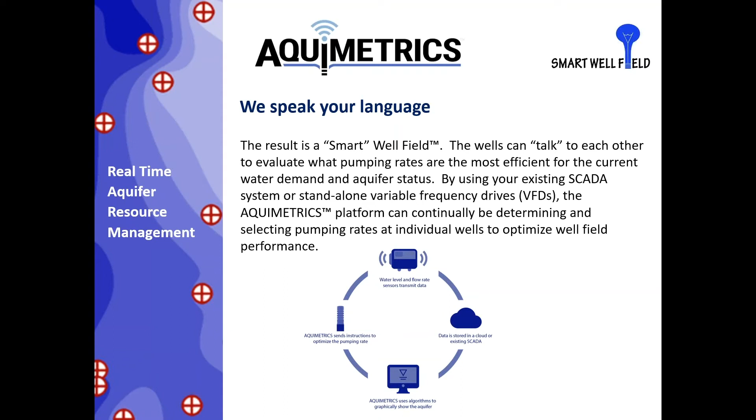What is a smart well field? A smart well field enables operators to employ hydrogeologic principles to accurately make real-time and automated decisions regarding pumping rates, schedules, and well maintenance and rehabilitation events. Specifically, a smart well field is a network of wells where flow rate and water level information are continually analyzed to turn pumps up and down and on and off to better manage an aquifer resource.

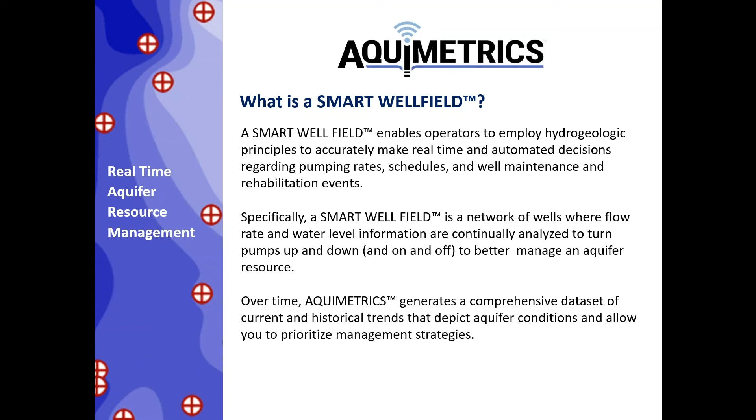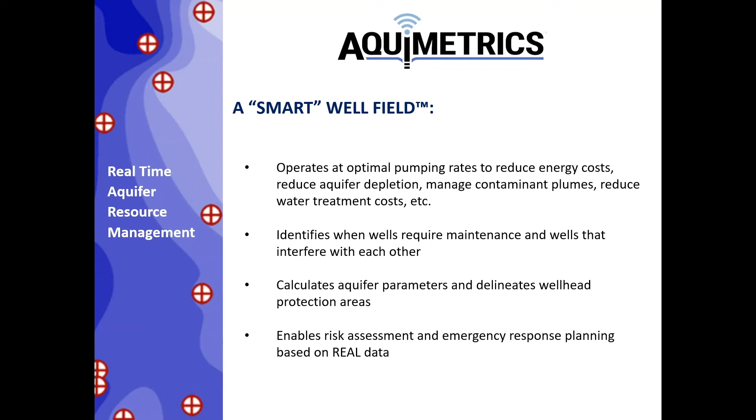Over time, Aquimetrics generates a comprehensive data set of current and historical trends that depict aquifer conditions and allow you to prioritize your management strategies. A smart well field operates at optimal pumping rates to reduce energy costs, reduce aquifer depletion, manage contaminant plumes, reduce water treatment costs, etc. It also identifies when wells require maintenance and wells that interfere with each other. It calculates aquifer parameters and delineates wellhead protection areas, and it enables risk assessment and emergency response planning based on real data. And we'll get more into these later.

So why this platform? Well, what we found over the years is that many well fields have been developed without a careful consideration of the local hydrogeology. More times wells are installed because the utility or operator already owns the property, or they want to site a well that is near the water treatment plant, or they're totally reliant on a well driller to tell them where to go to get some more water.

But groundwater does move in a predictable manner that is governed by physics, mathematics, and chemistry. Well performance can be optimized when wells are designed, installed, developed, operated, and maintained properly to ensure that the aquifer is being managed in a sustainable and an efficient manner.

Many well field operators already continuously monitor the well yield using flow meters. Fewer well field operators accurately monitor the water level in the well. By monitoring both, a hydrogeologist can perform numerous calculations to evaluate the well efficiency, well interference, entrance velocity, and capture zone of multiple wells.

So here are the technology components. The hardware consists of pressure transducers. This is a pressure transducer up in the upper right here. It's just a stainless steel probe connected to a cable. Many of you also have a digital flow meter that is connected into another telemetry box, or this telemetry box, or your SCADA system. The telemetry is the relatively new component that has really made this technology viable and brought

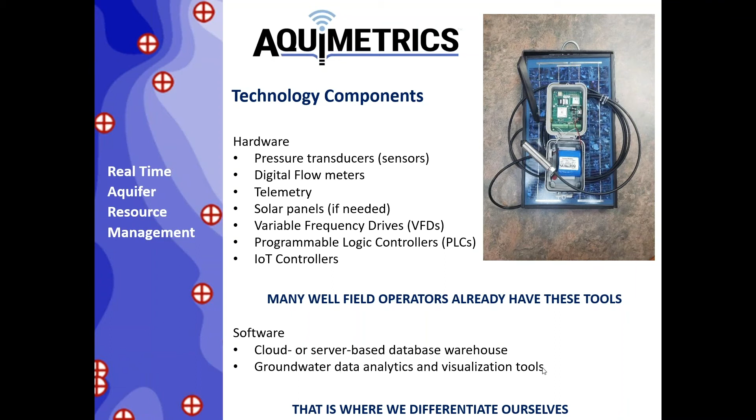So how do we manage your resource? There's numerous ways that we can specifically address the issues that you guys face every day. There's the drawdown and the energy consumption. There's the specific capacity, well efficiency, and entrance velocity. There's well maintenance and rehabilitation issues. There's well interference issues. There's the new well siting. When you have to put a new well in, where do you put it in, and how is that going to affect other wells? How is it going to affect your neighbors?

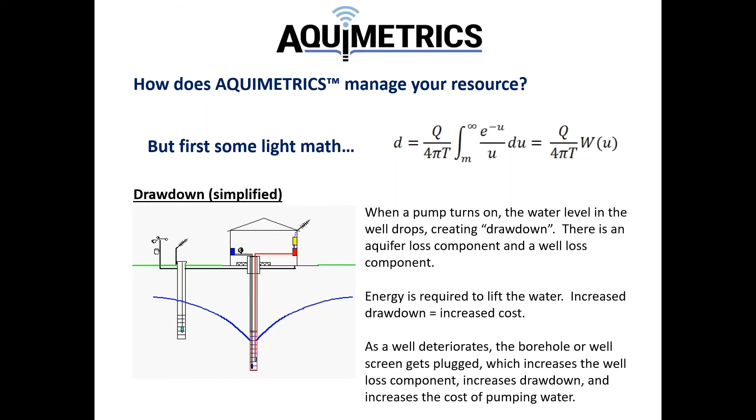A couple more technical terms that set up the basis of what our technology is actually doing. Specific capacity is defined as the ratio of the pumping rate and the amount of drawdown. So if you're pumping at 100 GPM and the drawdown is 20 feet, then the specific capacity of the well is 5. 100 divided by 20 equals 5. So over time, the well plugging will decrease the specific capacity. Let's say you're still pumping at 100 GPM, but your drawdown goes to 50 feet.

That would be a specific capacity of 2, and it would indicate that your well is getting plugged and it probably should have some maintenance done to it. We find that most operators do track their specific capacity, but we don't find a lot of operators who understand these next two terms in particular.

Well efficiency is the ratio of aquifer loss and well loss. It can be estimated in some cases by performing what we call a step drawdown test, and I'll demonstrate this a little later. But you can pump at various pumping rates over time, and it determines the sweet spot for each well, and it indicates if a well needs rehabilitation or redevelopment.

Even less monitored by most operators is the entrance velocity. So if you can visualize what's happening down in the hole as you're pumping water, all this water is entering this relatively small borehole from around the aquifer. And so it's defined as the speed at which water is coming into the well.

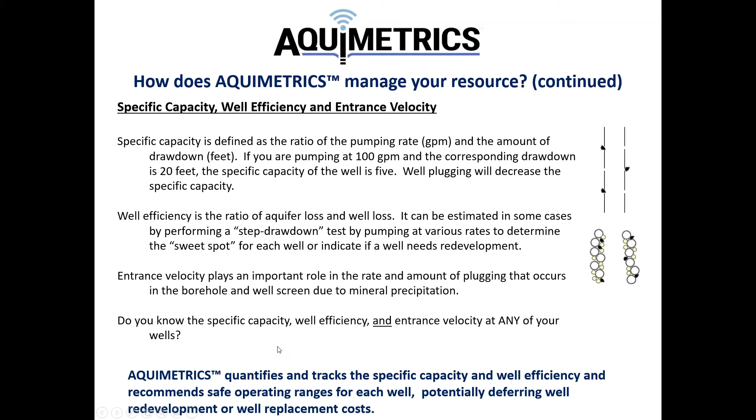So like I said, over time, the condition of the well deteriorates because the borehole or the well screen gets plugged with the mineral precipitation. We found that the well field managers generally rely on 3 different methods to decide when to redevelop a well. Probably the most common is a routine schedule. We ask our clients why they do it that way, and it's usually because it's always been done that way. The common schedules are 3, 5, 7, something like that, depending on obviously the geology and the hydrogeology of the area.

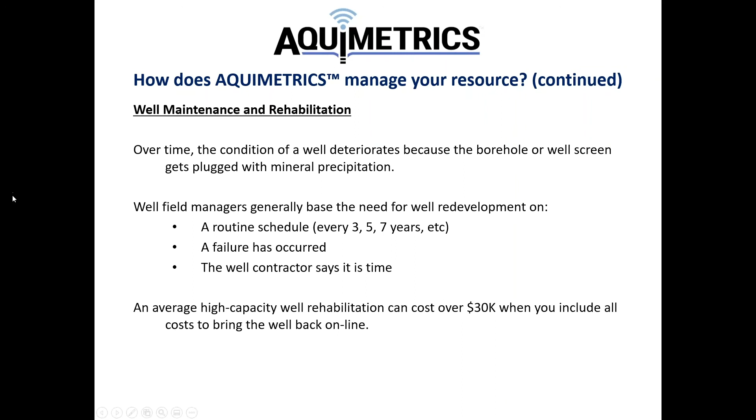We actually have had customers who fully admit that they pump their well to failure rather than spending the money on redevelopment. If they live in areas where shallow groundwater exists, perhaps a new well is just as expensive as a well redevelopment, so they'll pump to failure. It's also pretty common for a well contractor that probably installed the well or is their pump or well maintenance contractor, they'll call and say that it's time to do it.

In our area of the country, up in the upper Midwest, our bedrock wells are generally between 500 and 1,000 feet deep, and it can cost over $30,000 to pull the pump, mechanically or chemically treat the well, perhaps do a well video at that time, and then put the pump back down and bring the well back online.

We think there's a much better way to do that if we can utilize the sensor data from the well, the water level sensor and the flow rate sensor, and in a lot of cases, water quality sensors. We can have a much more scientific way of determining when the well needs redevelopment. We've had customers who have purchased our technology simply for this reason, that it helps them to have a much better idea what the efficiency of their wells is and when it's time to redevelop.

Certainly the return on investment of our technology is extremely quick. If we can come in and say there were 2 or 3 wells scheduled for rehab this year, if we can defer that cost, that can save many, many times the cost of the investment in the technology.

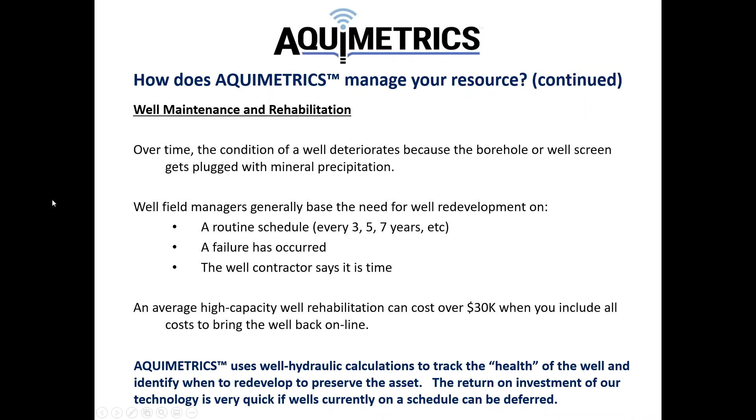Another common thing we see is well interference. We've run across lots of customers who say, well, we can't run wells A and B or 1 and 2 at the same time. We're not really sure why, but we just don't. And it's generally because the wells are placed too close together.

So we've created a mathematical solution to this. We have a database tool that hooks up to the data stream, and it can go across your well field, and it will quantify the amount of interference that 1 well or 2 wells is creating on any other wells. And I'll demonstrate that.

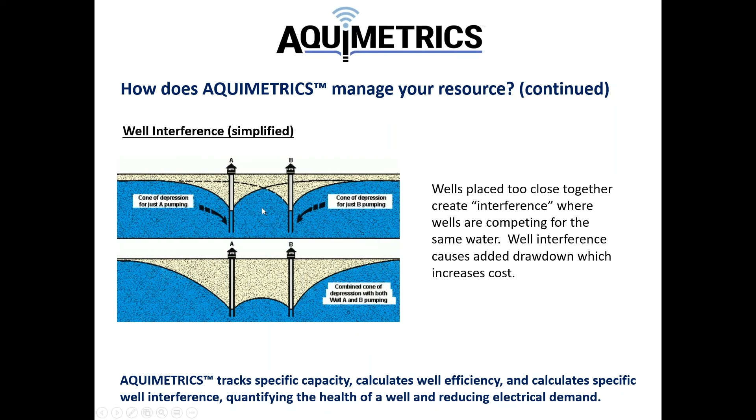Another big important component is when you need new wells. Obviously, as the population grows in your area or your wells are getting older, you need to put new wells in. A lot of times, operators will spend a lot of money to develop a groundwater model that is used to help evaluate the effects from a new well. Unfortunately, these models are based on assumptions that never accurately depict a real aquifer.

Our solution uses real data. Moreover, we learn over time, and we can really understand how the aquifer reacts by watching the effects of pumping and the effects of recharge, precipitation, and we can do this really at a fraction of the cost of a conventional consulting fee because the data are in a form to be analyzed immediately upon us leaving the installation.

So wellhead protection, risk assessments, and emergency response plans. Most of you probably already know that there is a federally mandated wellhead protection plan for all public water providers, including both public and private water suppliers, schools, churches, rest areas. Wherever the public is drinking water, there are certain levels of wellhead protection plans that are required.

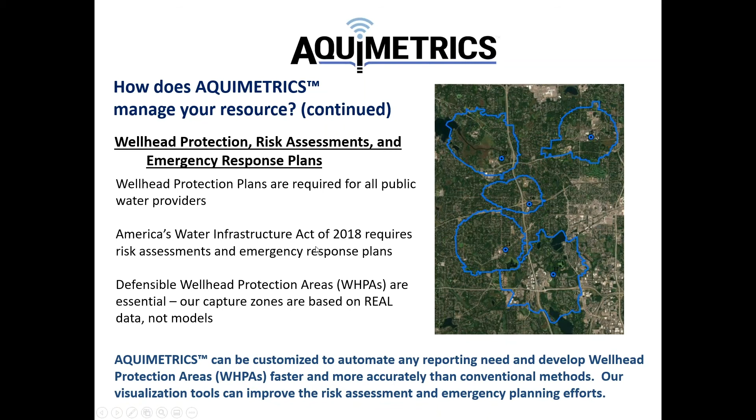In most areas, if you're going to put in a well that can pump a couple hundred gallons a minute, you're going to need a permit from the local water authority or regional water authority to be able to do that. Oftentimes, these require aquifer testing and long-term studies, and believe me, we've been doing these for 30 years, and that's kind of one of the reasons we developed this technology, because our technology easily incorporates the wireless access to the pressure transducers and flow meters, and we're basically doing all the hydrogeology all the time. So once you install our equipment, you are always performing an aquifer test 24/7, 365.

So water rights and liability assessments, litigation support. Obviously, water rights disputes and groundwater contamination lawsuits have traditionally relied on groundwater models that have assumptions that are rarely defensible. Large water users, including mining companies, irrigators, food and beverage processors, oil and gas companies, and public water suppliers, need to understand the potential liability of their water withdrawals.

Superfund sites often contain many extraction and monitoring wells to remediate contaminant plumes. The correct placement of wells and long-term monitoring strategy are important for cost control and defensible decision making. Because we use real data and advanced hydrogeologic methods to continuously record the effects of your pumping, both yours and people outside of your well field, on the local and regional levels, our database tool is a user-friendly data analysis platform.

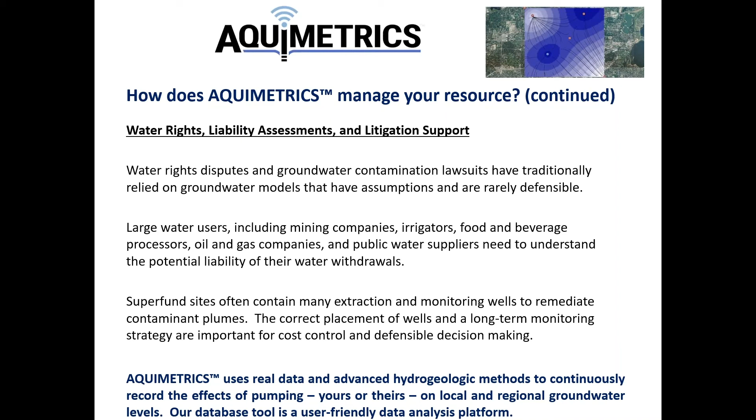For water treatment issues, we've talked about the minerals in the aquifer. In many places, especially in rural areas, we find the iron, manganese, and magnesium are generally not health related, but the staining and taste issues are major cost and customer satisfaction problems for water suppliers. Our technology can actually go around and evaluate the geochemistry of the well field. We can evaluate the optimal pumping rate to reduce water treatment. In a lot of cases, we can evaluate possible blending strategies, and we can perform a cost-benefit analysis of new wells versus water treatment issues.

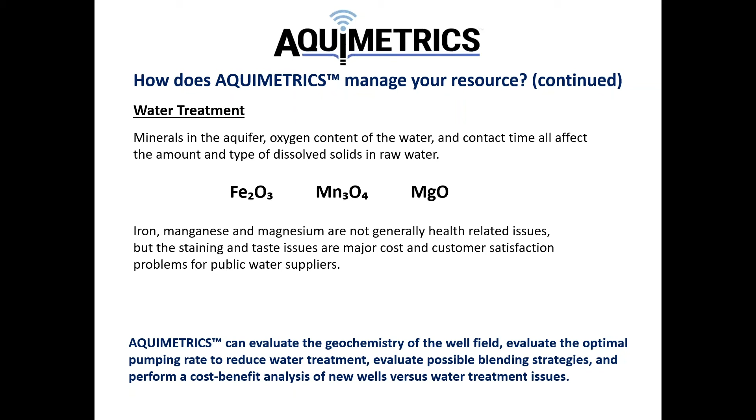In some areas of the country, they actually enforce water use restrictions. We find that communities who don't totally understand their aquifer are kind of afraid they're going to deplete the aquifer, especially in the summer when a lot of residential and commercial and golf courses are irrigating, and so they go on to an odd-even lawn watering restriction. These restrictions are seldom based on hydrogeology, and obviously if you go on an odd-even watering restriction, you're reducing your revenues by 50% during the periods of the watering bans.

So what we do is, over time, the technology will learn, and it will give you a predictive tool that you can use to see whether the current climatic conditions, i.e. recharge or drought in some cases, are going to make a situation where you could lower the aquifer. But in many cases, the technology will give you the confidence that you don't need to do that.

So what do you need to operate? We basically are leveraging the data from your existing SCADA system, or if you don't have a SCADA, it's very inexpensive and quick to install the necessary equipment to get you hooked up in the cloud. But for a smart well field, you do need water elevation data, pressure transducers or equivalent. There's lots of different methods of measuring water levels out there. We do need electronic flow rate data.

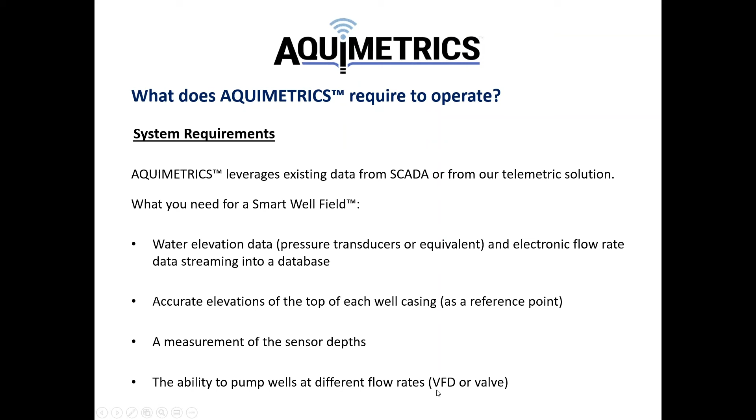So we tap into the existing SCADA or mine the data. We calculate specific capacity continuously by dividing the flow rate by the feet of drawdown. We calculate well efficiency by doing a step drawdown test, and we can watch that over time. The well efficiency is the ratio of the aquifer loss and the well loss. We also can calculate the entrance velocity at various times during the year by looking at the open area of the well by the flow rate.

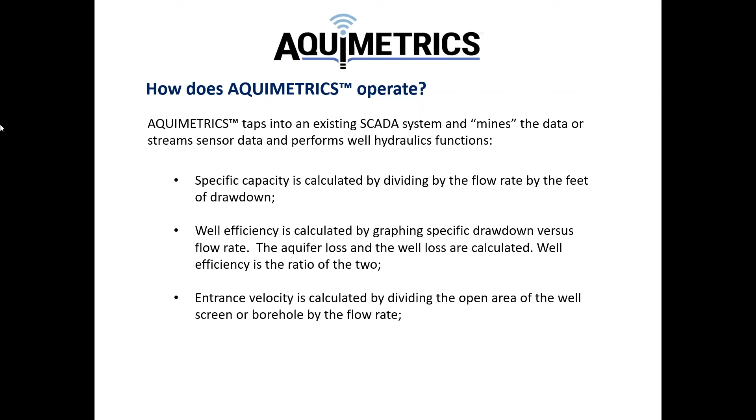So finally, the other two things we do, and probably this is the crux of what we're offering, is a potentiometric surface interpolated using a nonlinear drift kriging algorithm to accurately visualize the groundwater across the well field. The potentiometric surface is just a fancy word for a groundwater contour map. But what we can do is combine these individual timestamps that can be 1 minute, 5 minute, 15 minute, hour, day, doesn't matter.

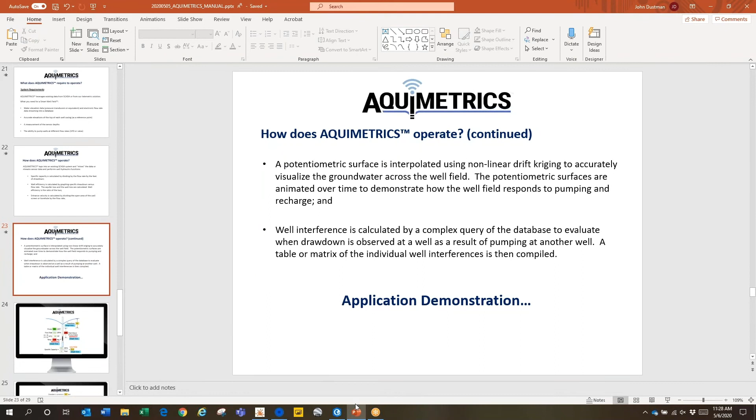We can combine these into essentially a video so you can see how the aquifer responded over time to changes in pumping and recharge. And finally, we can calculate the well interference across the well field and create a matrix for you that will help you determine what flow rates would prevent the interference. So with that, I'm going to jump out of the presentation here for a minute and demonstrate some of what we're talking about here. I'm going to kind of work backwards.

We've been an Esri business partner for over 25 years, and we thought it would be a good idea to integrate our technologies into the ArcGIS platform. For those of you not familiar, this is a product from Esri. It's called ArcGIS. They have different platforms. They now are supporting a desktop version called ArcGIS Pro, but they also have developed an ArcGIS Online and an ArcGIS Enterprise solution. We found that most of our customers have this program somewhere within their organization, usually the planning department. We haven't found a lot of water departments that are able to utilize this technology.

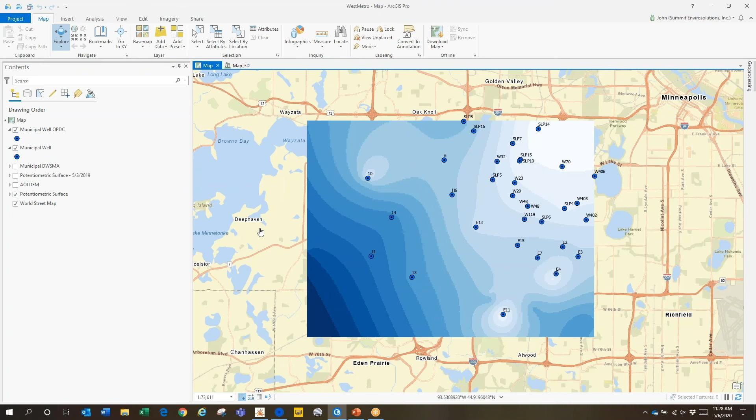So we felt that since most organizations already have this, we don't need to reinvent the wheel and create a GIS that you're able to zoom in, zoom out, change the base maps from streets to topographic maps to aerial photos, and we generate these potentiometric surfaces in a package we called Aquimetrics. By being able to export these maps, we found that it's very useful for communication amongst the project teams, public education, city council meetings.

Once people understand that these different colors represent different groundwater elevations, most people kind of understand that groundwater flows from high levels to low levels, and so the darker colors represent higher elevation. So this gives you a pretty good picture of what water is doing.

For our demo, we've been working with communities in the southwestern area of Minneapolis for many years, and so we've been able to get data from several different municipalities and look at those water levels as a whole, really regionally for the first time. We don't know of a lot of other areas that are doing this right now. So this is just the ArcGIS component. So how do we generate these images? We have another package that comes with our technology.

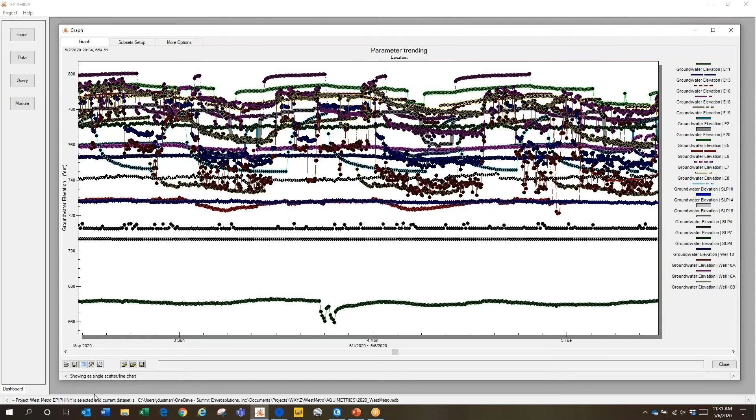I like to show this because it's almost like a Jackson Pollock painting. How could you possibly evaluate which wells are influencing other wells? So the same data set that you're looking at here has been analyzed using our third package that I'll demonstrate. And this is really the heart of our technology, and this is called Aquilytics. So this is where the heavy lifting is done to be able to look at groundwater in a much different way than has historically been done.

So again, this is the same data set that we were just looking at in the graphing package, and this is what we call our current conditions window. This is a potentiometric surface or a groundwater contour map across the well field in this particular time period. Now, these 3 municipalities, they collect data at different frequencies. So obviously we can't interpolate data that hasn't been collected.

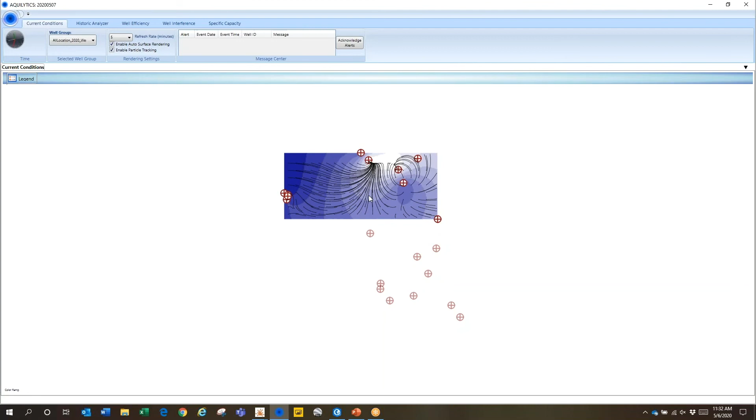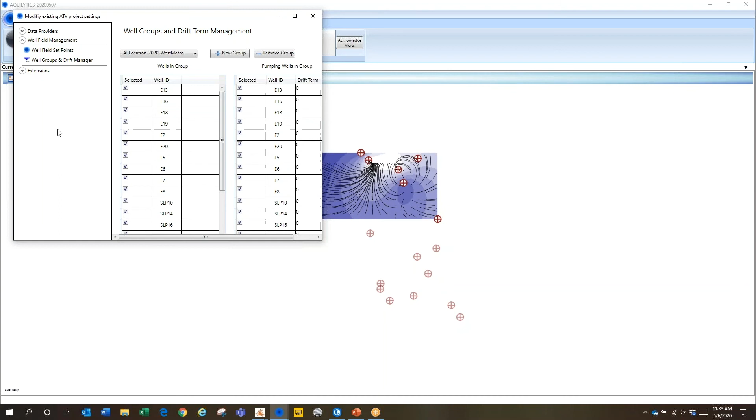So what I'm going to do is go in and kind of go under the hood for you. And this is totally user manipulative. You can come in and you can look at different wells. If I wanted to take wells out or put wells in, you can come in and create your own well groups. You also can configure all of the extensions. So for the current conditions, I want to see all the 2020 West Metro wells. I want my colors to be 10.

I want to start, I'm going to change this. Well, it looks like it just refreshed. And so it came out to a time period where they had all the wells. For the historic analyzer, I kind of like to crank the colors down, and we can decrease the cell size so we get a much crisper map.

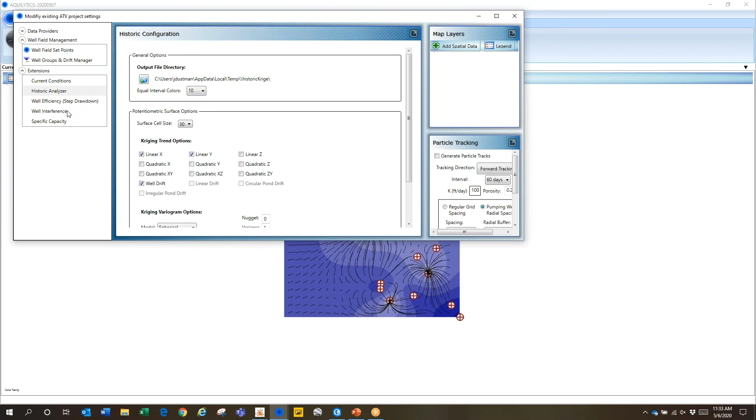The well interference tool that I'll demonstrate in here for a minute, what I've said is in order to evaluate interference, I want to see a change by 1/10 of a foot within 5 minutes of a pump turning on. But you can obviously change these depending on the type of aquifer that you have. So I'm going to save this, and it's going to come out and refresh.

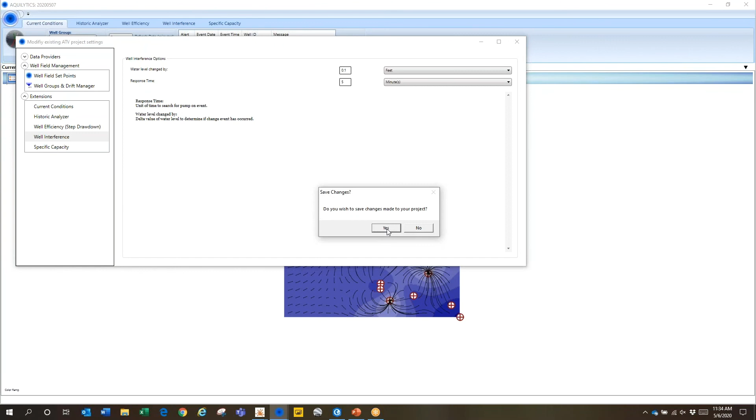While it's refreshing, I'm going to go in, and this is the historic analyzer component. And with this, I'm going to resize the window to fit the well field. I'm going to say I want a West Metro well. I want to see the minimum amount that the aquifer drew down over a day between May 1st and May 6th. So I'm going to start, and it's going to say we're going to do 6 for you. Would you like to proceed? Yes.

So this is where the mathematics come in. Now it's taking the actual water levels and flow rates from all those wells, and it's using a relatively sophisticated algorithm to generate these pictures that, again, show which wells are pumping, which wells aren't, and how the water between those wells is behaving. So we talked about this concentric circles or the cone of depression. This well just turned off. This well is on. This well is on. And so over time, it's building these animations so you can see whether your well was affecting other wells, but maybe more importantly, where water is coming from and where it is going.

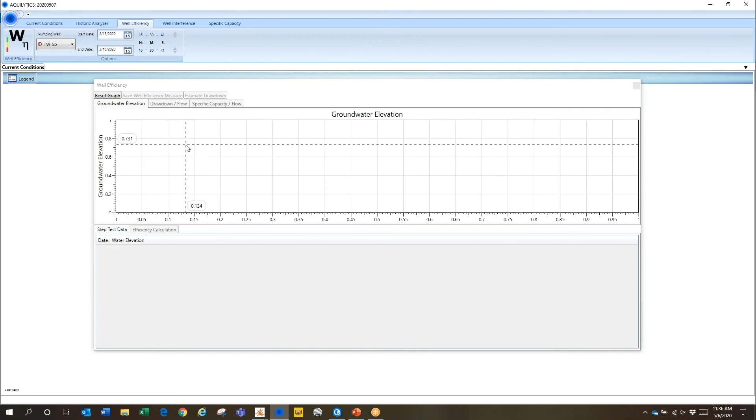The well efficiency tool: if a lot of you have variable frequency drives or have valves on your wells, what we do is we work with you, and you can run what's called a step drawdown test. And it's called that because you increase your flow rate incrementally, maybe at night, maybe between 2 and 6 in the morning, you can run this test.

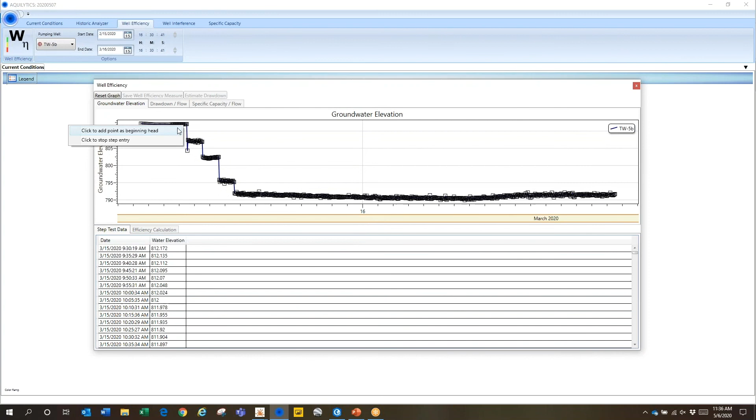You might do it once or twice a year, but what we've done is we've embedded the mathematics behind this graph. And so if I right-click and I come to the bottom of each step, and I would do this more carefully, obviously, if this was real, but for demonstration, what we've done is embed the math behind here so you can quickly come in and look at the well efficiencies.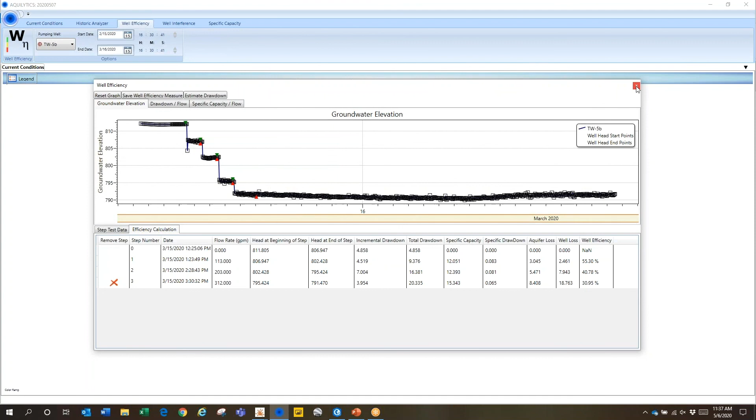So you can see that here's your aquifer loss component, your well loss component. Here is the well efficiency, and you can see that it started out at about 55% efficient, but went down to about 30% efficient after the last step. And so this well would probably be a good candidate for some maintenance or some rehabilitation. So that's kind of the well efficiency tool. There's lots of other graphs and metrics that we've included, but I'll skip through that.

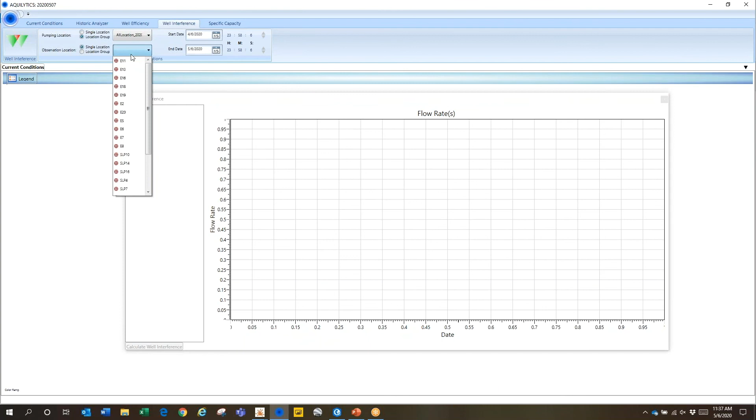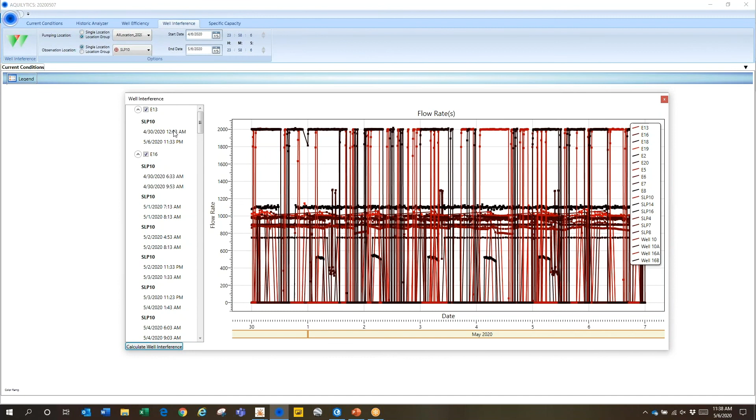Our well interference tool is what I was talking about, how you can go through and you can look across your whole well field as to which wells interfere with other wells. If I choose all the wells and I choose a specific observation well, it's going to go and get all the data, and with the click of a button it's going to see time periods where E16 appears to possibly be affecting this SLP10.

And so by clicking through, you can quickly go through and evaluate whether it is something that did it or not. And you can go through the entire well field to do that. Once you find out wells that interfere with other wells, you can then make corresponding schedule changes to make sure that the drawdown is not increasing significantly and costing you more electricity.

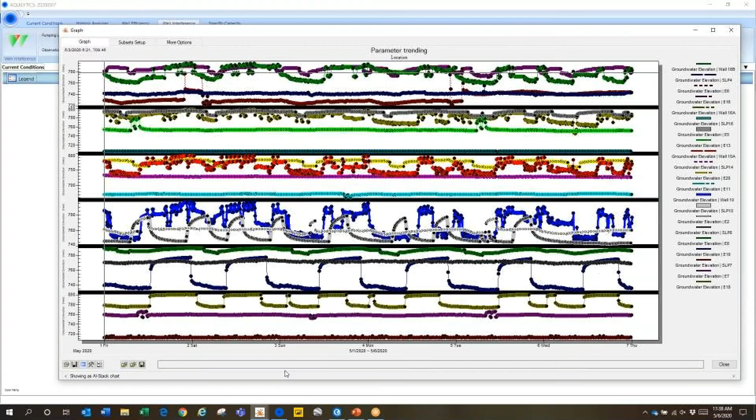But this can be a pretty handy tool because it would take hours and hours and hours to try to go through that same pumping data that I was showing over in Epiphany to evaluate which wells have effects on other wells. So that is the well interference tool.

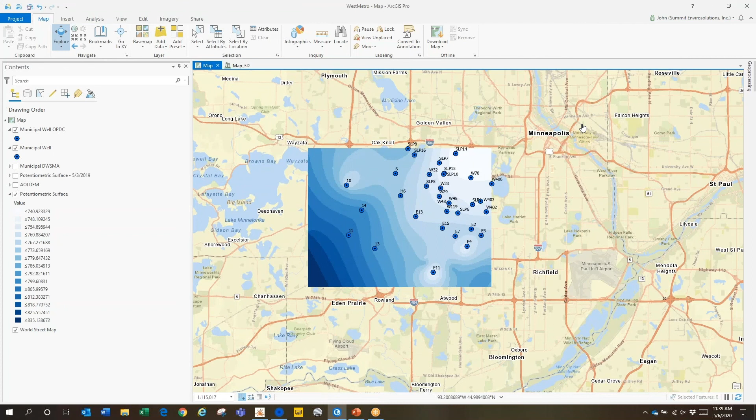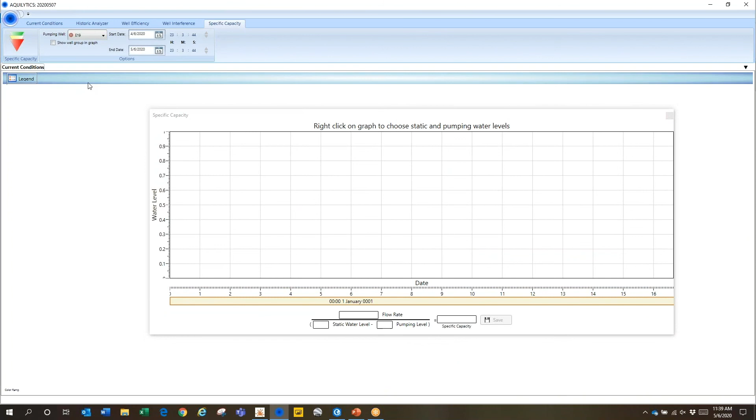The last module is our specific capacity module. A lot of folks are already doing this. We've just, again, made it very simple by mining your SCADA data or our telemetric data. If I choose any pumping well, it's going to go out to the database and get the data. Those of you who are well field managers, you'll recognize this as a pretty standard hydrograph of a well that has been turned off, turned on, turned off, turned on, a very common schedule. This looks like this well pumps once a day for maybe half the day.

So by right-clicking at the top and setting the static level, and then right-clicking on the pumping level, it goes to the database, it knows the flow rate, it knows the drawdown, so it knows the specific capacity. And if you save this to the database, then over time you can watch the specific capacity of all of your wells, and we can help you to send an alert as to when one well appears that it may need some maintenance or some rehabilitation.

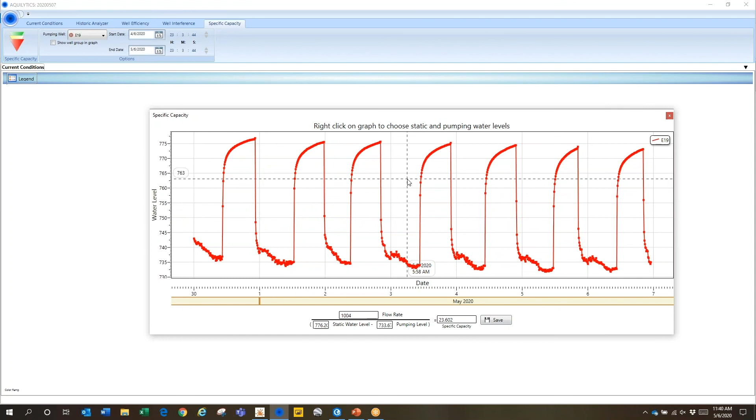So again, the five modules are the current conditions of what is actually happening in the aquifer now. The historic analyzer shows you what happens over time. The well efficiency module shows you whether your wells could stand some redevelopment, as well as the specific capacity tool. And the well interference tool tells you if there's some low-hanging fruit in changing your flow rates or your schedules to reduce the overall drawdown within your aquifer.

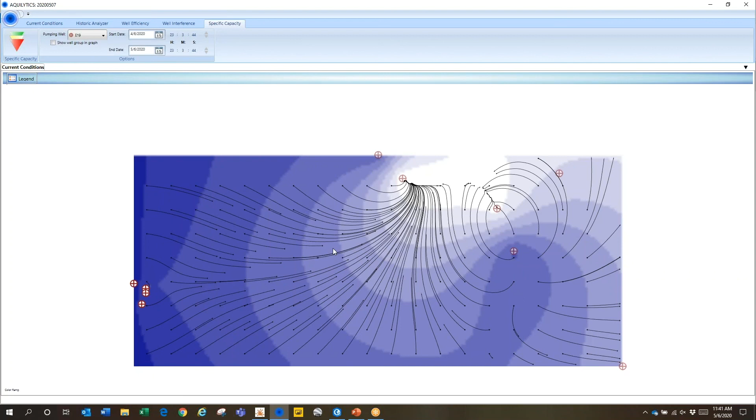The other thing that I didn't point out here on the current conditions is the particle tracking. So this is how we can, over time, look at a particle and where it would flow over time. Your wellhead protection areas and your wellhead delineations are based on this exact picture. Here's a great example. It just scrolled through the data, and we're looking at these concentric circles, and you can see how these particles are moving into the well.

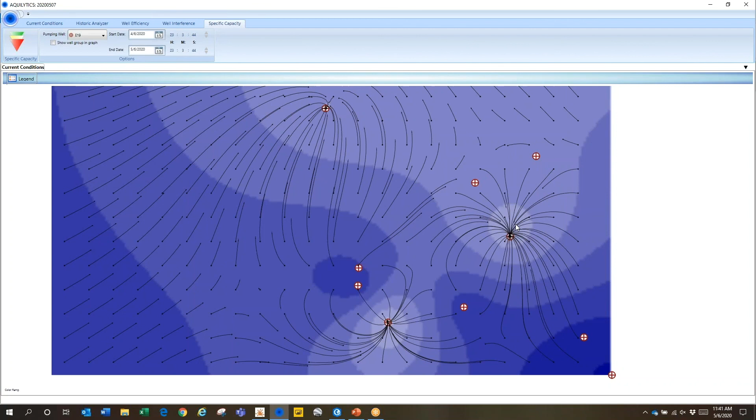These are truly vectors, so the length of the arrow is the velocity of the water. So we can ask this to do it at any time period, both looking forward and looking back, and this is how you can generate a fairly accurate capture zone in a 10 or 20 year time of travel for your wellhead protection planning efforts.

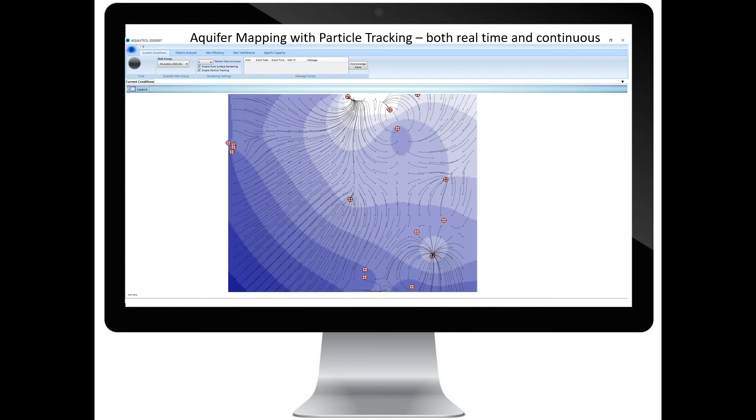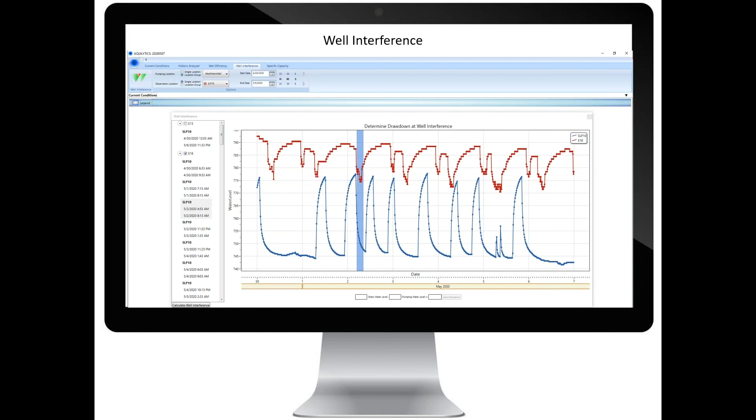So in summary, we've gone through and demonstrated how we can create aquifer maps with particle tracking capabilities in both real-time and continuous time. We demonstrated how we perform a step drawdown test to calculate well efficiency. We demonstrated how to go through and make a complex query through the database to identify wells that interfere with other wells. And we demonstrated how to calculate specific capacity for any well in the well field.

We also have the capability to make custom screens for your telephone or your iPad, tablet PC, and really we can bring data from a data feed into any kind of platform that you or your employees would like. This one in particular shows that the pump is running, the flow rate is 800 gallons per minute, the VFD is set at 58 hertz, the current temperature of the water is 75.

We can also color these and put warnings and graphs if there's something wrong in the well. We also show the drawdown, the feet above the pump intake, and warn you if that's getting close. We also can caution you if the specific capacity of the well is going down too fast.

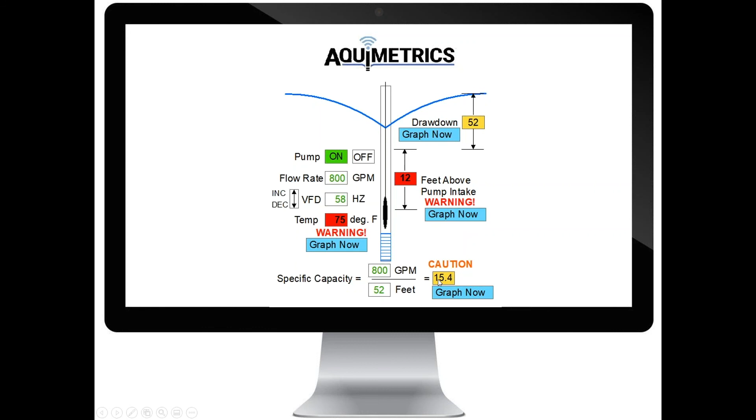This screen kind of shows a drawdown monitor. This would indicate that maybe the aquifer is getting depleted because you can see that the well doesn't get back to where it was originally. It also shows that there might be some better pumping schedules. It's hard on the pump when the pump is turning on and off and on and off. In this case, if they lowered the flow rate and increased the amount of time they were pumping, they would probably significantly reduce the drawdown and therefore save electricity.

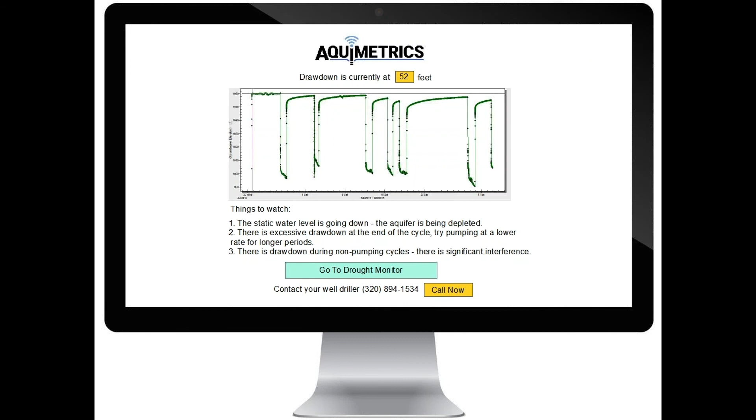Some of the economic benefits that we see in installing our technology, first and foremost, is we guarantee a 10% reduction in the total drawdown across the aquifer, across your well field, or the technology is free. We also estimate that you could save about $30,000 a year in maintenance savings if you were redeveloping wells that don't need to be redeveloped.

We think you could see a significant decrease in the amount of fees that you're spending to develop wellhead protection areas. We can also see a potential revenue increase if you are needlessly enforcing water use restrictions or you're managing wellhead protection areas that are much too large. But at the end of the day, I guess we see that extending the life of your aquifer is really what this is all about.

What does it cost? We charge $100 per well per month for the license fees to be hooked up to the cloud-based aquifer resource management system. The average installation costs for the instrumentation, if you don't have them already, that's come way down over the years. We are averaging about $1,250 per well for the transducer, the cable, the telemetry, and the labor to install it.

We also have a couple optional services that include a well field health analysis. Once we see how you're pumping for a month or two, we can develop a written report or a virtual meeting with you and your staff, and we'll go through and make recommendations on each individual well, looking at the specific capacity, well efficiency, entrance velocities, well interference, and that generally runs about $3,250.

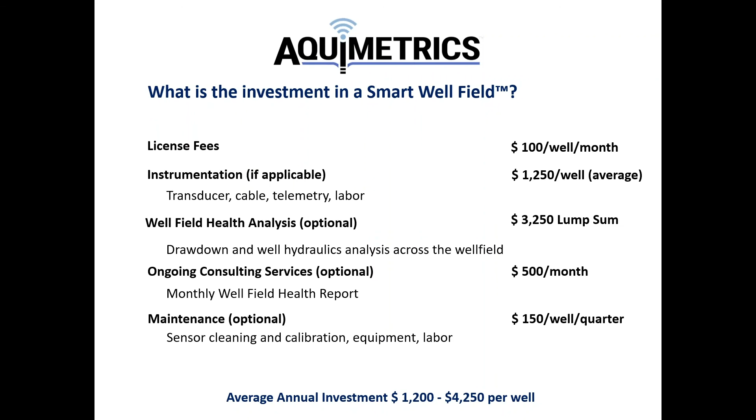Finally, the maintenance is another optional task. You can do it, we can do it, but really somebody needs to go in once a quarter and clean the sensors, calibrate the sensors, and make sure that everything is running properly. We see an average annual investment of approximately $1,200 to $4,250 per well per year. Certainly we feel that the payback on this could be anywhere from weeks to months, but in the end, the technology essentially pays for itself.